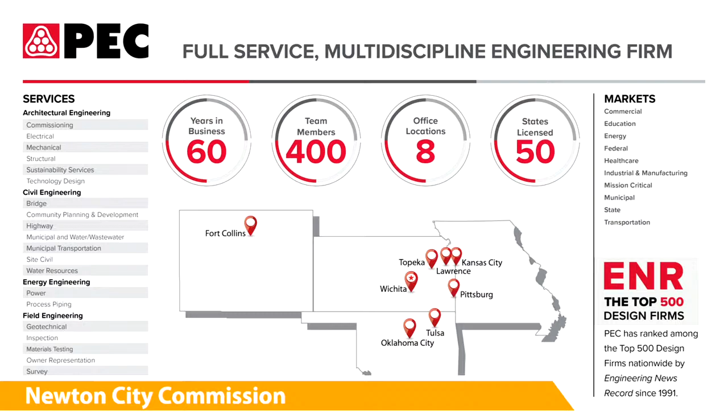I think probably most of you are familiar with PEC, or Professional Engineering Consultants. This is just a brief introduction to our company. We're headquartered down in Wichita, proud to be one of the only full-service engineering firms headquartered in South Central Kansas. We have about 400 employees and several satellite offices across the region, so we are very diverse in our expertise.

Now let's get to this particular project. The Safe Streets for All initiative is a relatively new initiative rolled out by our federal government. This program provides funding for both planning and capital projects to local governments all across our country. The goal, from the federal perspective, is to reduce fatalities and serious injuries happening on our public transportation network, whether that be highways, local streets, township roads...

...sidewalks and parks, really looking at the entirety of the network to reduce fatalities and serious injuries, which you can think of as a life-threatening injury that causes you to need to take an ambulance to the hospital. That's what a serious injury is. So from the federal perspective, that's the goal, to reduce these all across the United States on the entirety of the public transportation network.

Again, whether that be owned by the state DOT, KDOT in our case, or a township gravel road, we're really looking at the entirety of the network and all users of that network. Whether you drive a passenger car running errands, or a semi-truck as your job, or a farm implement, or maybe you're walking, bicycling, or in a wheelchair, we're trying to address the entirety of users across the entirety of the network.

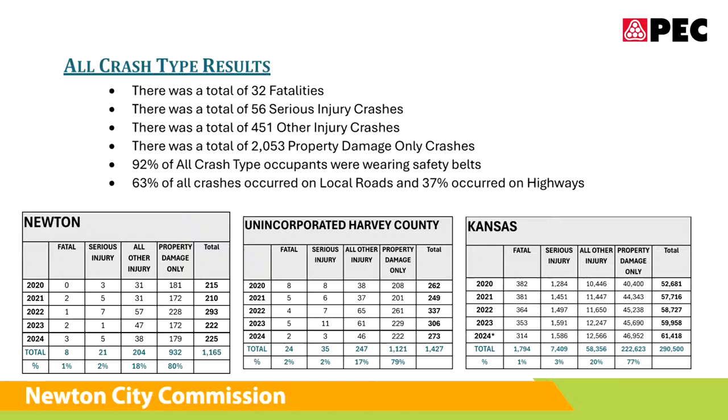So we took that, we got some of this basic information, and we put that into what we called a high injury network. I'm sort of summarizing a lot of this to get to this end product.

Yeah, I skipped those because they were real detailed. We have more information in the PowerPoint if we want to see some more detail, but essentially we were looking at the spatial distribution of crashes, the type of crashes, and the contributing circumstances that led to the crashes, as well as an engineering assessment of each location where a crash happened, comparing that with the traffic volumes on these roadways.

So here were, from the technical perspective, the major issues in Newton. Really focused on the intersections at the local streets. There's definitely a disproportionate risk to pedestrians and bicyclists in terms of serious injuries and fatalities as compared to their representation in the system, their activity in the system.

The behavioral factors multiply the severity. We've listed those there: distraction, speed, alcohol, and drugs. For example, if a property damage only crash were to happen, when these four other things get involved, the severity increases.

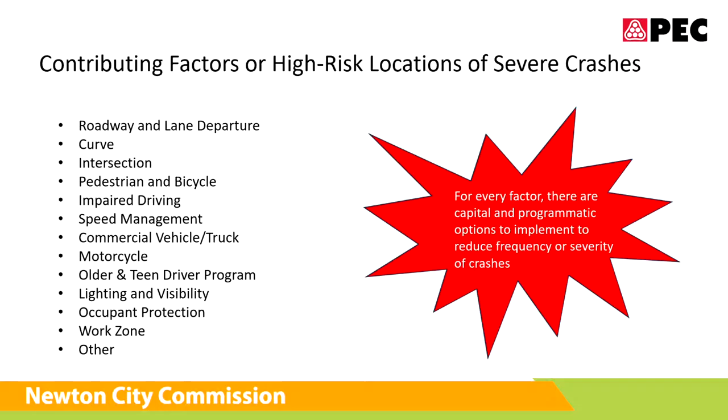So we've worked with the staff and have come up with countermeasures for all these different categories of things. I'm going to go give a few examples so you can get a sense here.

For example, roadway and lane departures. This is something that rose to the surface in the unincorporated county areas. So for a capital option, you could do rumble strips along the center line and rumble strips on the edge of pavement line. The goal here is it alerts drivers from drifting out of the lane.

Probably many of us have experienced these rumble strips. These have been proven to reduce fatal and serious injury crashes anywhere from 36 to 44%, depending on the environment it's in. So that's a pretty big bang in terms of reducing crashes for a relatively low cost. You're not going in and tearing up the roadway or reconfiguring the whole intersection.

And here's an example of a programmatic activity. You could add a line item or a budget for a road safety audit program in your annual CIP or your annual street maintenance budget. That would say we're going to do 5 road safety audits every year. You would set the number and say we're going to focus on going to specific locations, specific intersections.

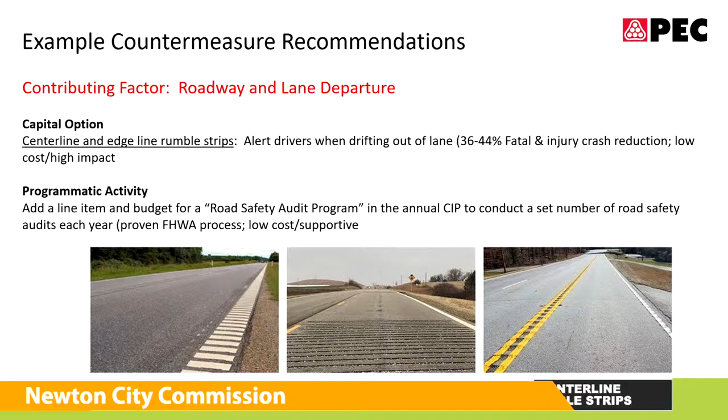Or we're going to pick 3, or 5, whatever your number is, and we're going to go out and do a road safety audit and really dive in and see what is going on at that particular location safety-wise. There are multiple capital options to treat this contributing factor and multiple programmatic activities. We're just trying to give you some examples quickly. We didn't want you to have to be here all night.

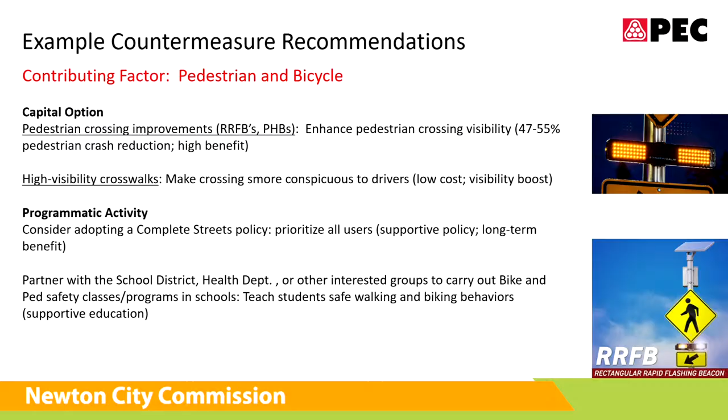I probably should have said that at the very beginning. That was really the reason for doing this whole plan, it was a requirement to have this plan done in order to be able to even apply for a capital grant through this program.

Probably should have said that at the beginning. I always make a joke that we have to go through this dumb plan to get the project we want to do. So we'll go through this exercise.

So the last example here was occupant protection. This is one surprising thing we learned through this, especially in the unincorporated part of the county. Here's a couple of capital options: adding a sign, or having stations to inspect child protection seats, car seats, or programmatic activities. KDOT has several programs to support inspecting how car seats are installed, so taking advantage of programs that other groups or governments are already doing, and promoting those.

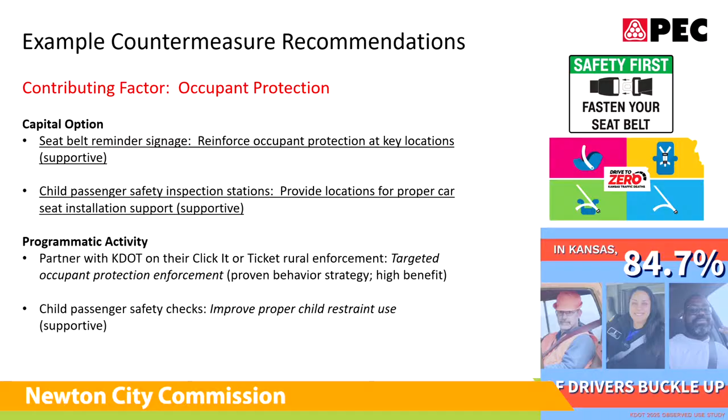Now I'm going to turn it over to Suzanne, and she's going to talk about the concepts that were developed. As part of our scoped effort, we were scoped to develop five separate concepts shared over both the city and the county. The idea is that whichever one is selected or rises to the top, one could be applied for by the city and one could be applied for by the county to get this capital grant that's coming out of this. Keep that in mind, and I'll turn it over to Suzanne.

The other thing I want you to keep in mind as we look at the concepts: be open-minded. These are not recommendations. We're putting forward some concepts that have multiple elements for the public to see and discuss, because we're taking this to the public forum to get input. The items were chosen based on all of the technical information and the public input that was put together, and we're trying to address the things we think will decrease those fatalities and severe accidents, and prevent others from happening.

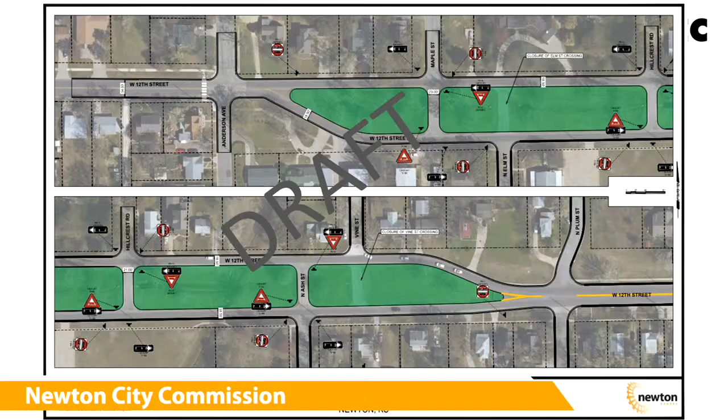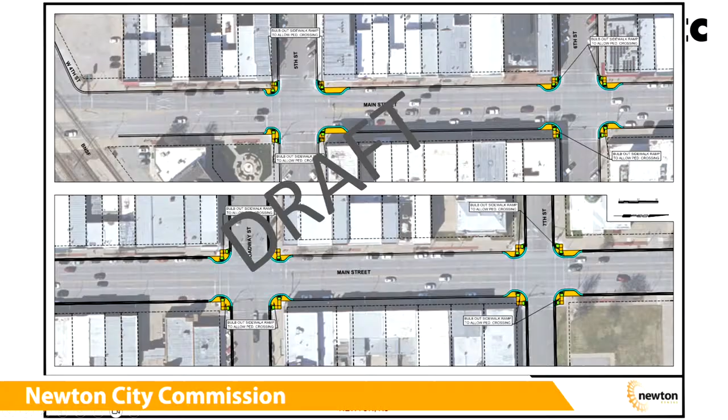So that's concept design 1, option 1 for this piece of Main Street. That's a blown up area so you can see it. It extends those bump outs to the opposite side of the parking, opposite the curb side.

Now, I would be remiss if I didn't mention there are some cons to this. Those cons come up when you start looking at drainage, because you've got inlets at those intersections that take on water, so getting drainage to flow around that, there'll be some tricks that have to occur in the design. And street maintenance staff, when they're clearing snow, can't just blade right on down straight through there - they're going to be going around little curved bulb outs, and that'll be an annoyance. So with everything, pros and cons.

Okay, now here's concept design 2A. I know these are little on the screen, but we've got things color-coded for you. For this one, this adds a protected left turn. Right now you only have one, right here at 5th Street. But this adds a protected left turn all the way down from the BNSF tracks to 8th Street, which for the driving public, you can see it's offset.

So let me go to the bigger view here. When you're at 8th Street, you see how the turn lane is right here, and it's not in the very middle of the road, it's offset. That allows the person making a left-hand turn to be able to see the oncoming traffic, so that you aren't turning and ending up with a T accident.

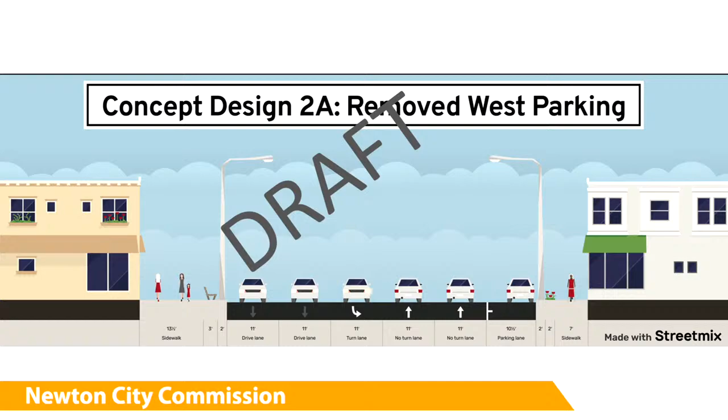Again, these are just elements, right? So here's concept design 2B. Same thing, you've got your lane going down the middle, you've still got your bulb outs, but they're only on one side.

I didn't point that out on the last one. They're only on one side, because if you don't have parking over here, you don't want to have your bulb out, or people would be driving into that bulb out. This puts the no parking on the east side. So you see the purple, that's the parking on the east side. It's the same as the last option, just flipped.

There it is up close, same as the other, just the other side. Looks the same in the cross section, we've just flipped it over. And there's no parking then on the east side, okay?

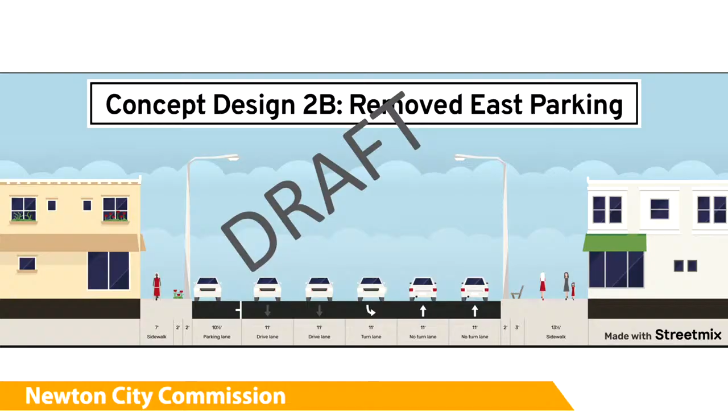All right, then concept design 3. This has your middle lane for turn protection, both sides.

Our traffic engineers have brought this forward as something to consider. The public has an opportunity to comment. This is not a recommendation. This is a concept, and there are multiple elements here.

You may just want bulb outs. You may want a turn lane only in one block. You may want, which I would question that a little bit, but it's something to consider. You may decide there's one block that you don't need as much parking. We're just trying to show you the elements of what you can do to help eliminate these conflict points, and make the transportation network safer for the walking, biking, and driving public, okay?

So this shows no parking, both sides. And then you have, how many times have you been driving along and somebody opens their car door, and maybe that causes an issue? So there's lots of things to consider when you start looking at no parking.

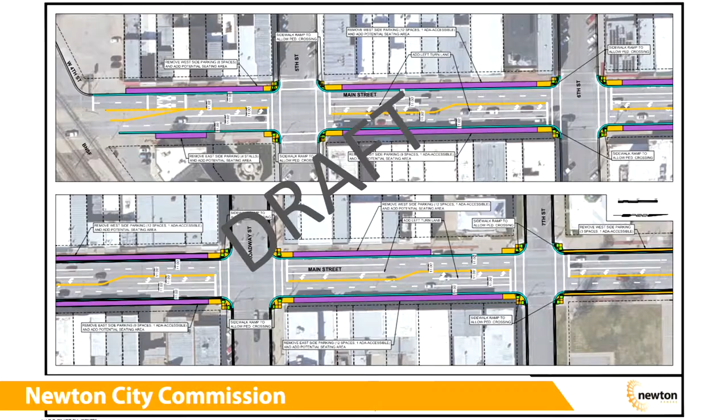In a less rural community, you wouldn't have parking necessarily downtown. It would be maybe behind the businesses, and then the places that you're going to go in and sit, you might have more tables out front along the sidewalk. That's the thing that you're looking at within your comp plan. I understand that has been some of the things brought forward for you to consider. Just to consider—these are just options, okay?

Here's the up close. So, and the next one is the one you really want to look at. Here's your cross section for both east and west. So you have sidewalk and room for tables, room for people to congregate, and then people can still drive through, you can still get your traffic through, but you would be parking behind instead of along the street, okay?

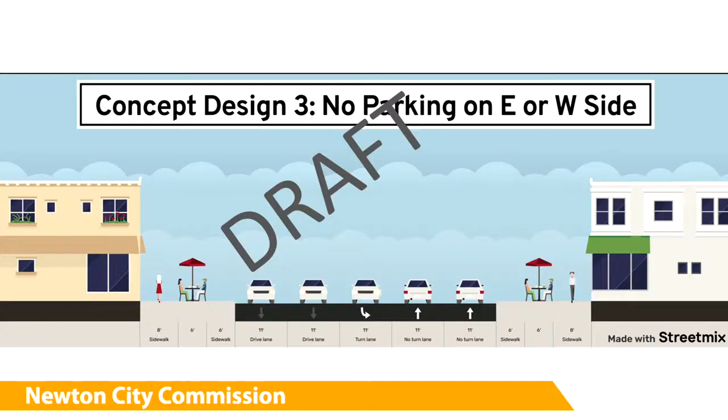Okay, let's move to the next section of Main Street, from the tracks south to First Street.

Same application, you skipped that slide. What? You skipped the one that shows how many parking spaces we—Oh, I'm sorry, yeah, you're right, I did. I don't know what happened.

Okay, so here, this shows parking spaces removed under each option. So 2A, when you remove parking on the west side, it gives you by block the number of parking spaces that are eliminated, total of 50, okay? For 2B, if you remove it along the east side, another total of 50, right?

The third one, where there's no parking on the east or the west, you're totaling them and there's 100. If you're looking at this map—and we didn't get this on here yet—but the colored dots, if you're looking at this later, the purple dots are the parking eliminated during concept 3. The green reflects concept 2B and the blue concept 2A. But the numbers tell the story, really. It's just looking at the blocks and where they'd be eliminated, okay?

Suzanne might mention too that even if we just did concept 1 with the bulb outs, you lose a stall for each one of the bulb outs. In most of those locations, you would lose your full parking spot for those bulb outs.

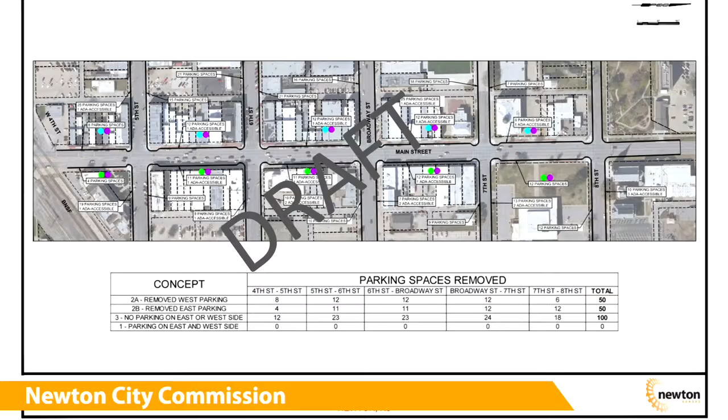50 sounds like a big number. Yes, it does. I'm afraid we might be run out of town for making a decision. But you're not making a decision. This is not a recommendation, these are elements to consider. Yeah, just removing parking spaces.

I mean, it's so tight anyway when you come downtown and people are looking for spaces. So where do they go? What would be the recommendation about where they would go? Around the block or side streets? When you go to Walmart, you have to park several spaces away sometimes to get in. This would be similar to that. You'd park on a side street or behind and go in a back door.

Now, you'll be glad to know that we are taking this similar presentation with these concepts to the public, and one of the groups we have invited, Jen has helped us, is the downtown group that we'll be speaking with. We're doing a special presentation for that group, so they'll be able to give all kinds of comment, very similar to how we did in the original community engagement round. So the purpose is to have people talk.

But remember, we would not be doing our job on this transportation safety plan if we didn't bring all the options forward. It's okay that you are going to consider other things when looking at them. But you could say, if we don't have as many parking spaces downtown, then people aren't going to come downtown and we won't have to worry about it because there'll be less traffic. And we won't, but if we didn't provide these things, somebody else is going to say, yeah, but everybody keeps getting hit, how come you aren't doing anything about it? So we're just trying to find a happy medium here.

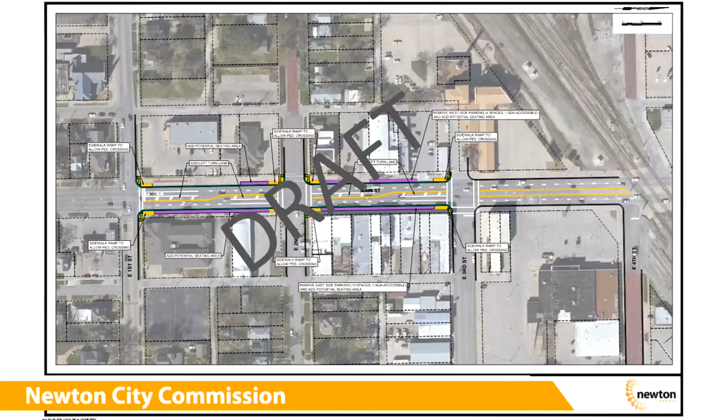It's just like the piece to the north. There's a slide that must have gotten eliminated, but we can get it for you — it shows the number of parking spaces for this section too. I don't know what happened there.

Okay, Washington Road. The concept design 1 is from Southeast 10th to Southeast 8th. Again, the reason we're looking at different areas is because there were accidents and crashes at all of these intersections. Due to sight distances, when you have multiple legs of an intersection — in this instance you've got 5 as they are today — and vehicles coming up to that intersection, the sight distance for somebody pulling up on Pine Street trying to look north on Washington is difficult to see for multiple reasons.

Walnut, same thing at Southeast 10th and Walnut. The sight distances, the points of conflict, and crossing multi-lane facilities here are several of the reasons we have accidents at these locations.

So what we looked at was trying to put a cul-de-sac and dead-end one road that had another way out, to eliminate one of the legs of the intersection. And we also have another element, remember, multiple elements: turning this roadway into a 3-lane facility so that you have a dedicated left turn lane running the distance here.

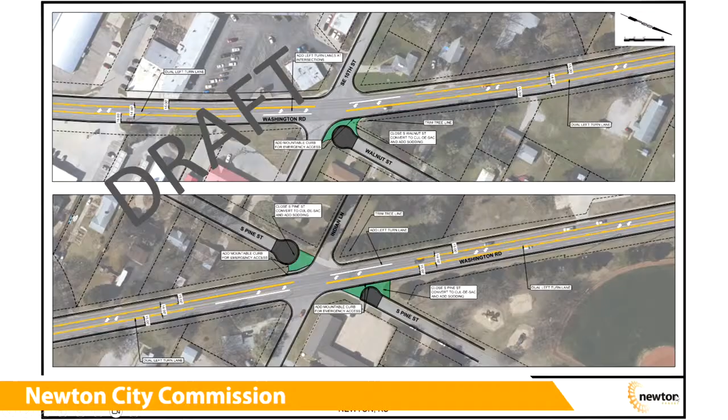This kind of gives you an aerial view so that you know what it would look like. They're just kind of fun when you can see a concept there, adding in cul-de-sacs.

We wouldn't show the elimination. Where there is parking today, I believe you'd be able to keep it. But if this was selected, we would definitely look at that in more detail.

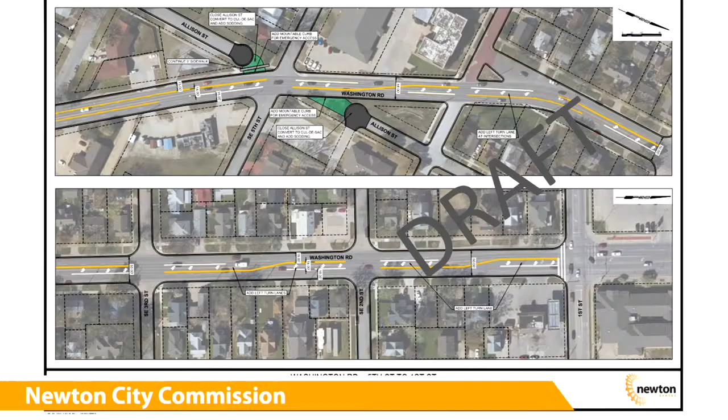All right, that's all of this - those were the city concepts. We'll quickly talk to you about the ones that we are proposing for the county to be considered. These will be available for people to look at the open houses, because the open houses are open to everybody. So the first one is at Hesston and Hoover Road.

Hesston Road, you know, that's Old 81 that goes out of Newton up to Hesston. And there are multiple intersections that have skewed crossings. They're not just crossing Hesston Road, but they're also crossing the railroad that's on the north - skewed, not at a 90 degree, which is the preferred method for traffic and transportation safety, so that you have good sight distance.

So if I'm gonna rebut this and say, well, why would we spend the money to do this? Why don't people just pull up to this intersection and square their vehicle? Well, why don't people just drive the speed limit? Why don't people do all kinds of things? But we implement traffic safety measures so that we are helping to address those conflicts that occur on the transportation systems. And so there would be some right-of-way that has to be purchased.

And this application at Hesston Road - there are multiple crossings that this could be addressed on, at all of those crossroads, to square it up, if you will.

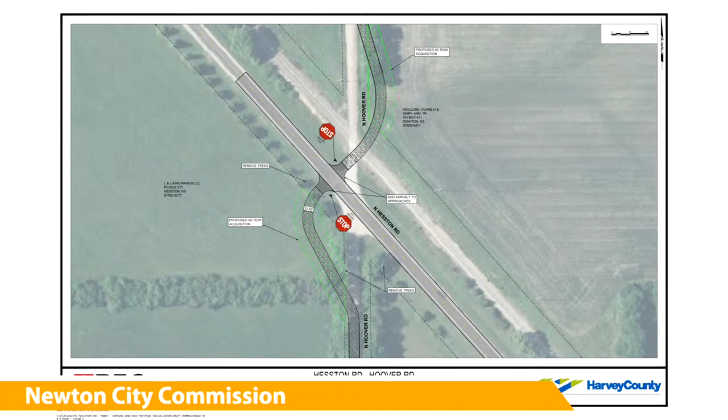Then the next one is down by Sedgwick - this is Ridge Road and 84th Street. If you've been on Ridge Road, you recall where you're coming up Ridge Road and then you do an immediate right turn, a 90-degree turn, and then another one back the other direction. There's accidents that occur in this area frequently. And that's what popped it up.

Plus, people commented about this one in our community engagement. So concept 1 for this location is the full bore - look at it and straighten out the roadway. There would be right-of-way acquisition, and then the road as it sits today, for those that access and or live along there, this would come in at a 90 to the new Ridge Road so that we don't create another problem, right?

And stop signs here at this intersection. That takes care of those oddball 90-degree turns.

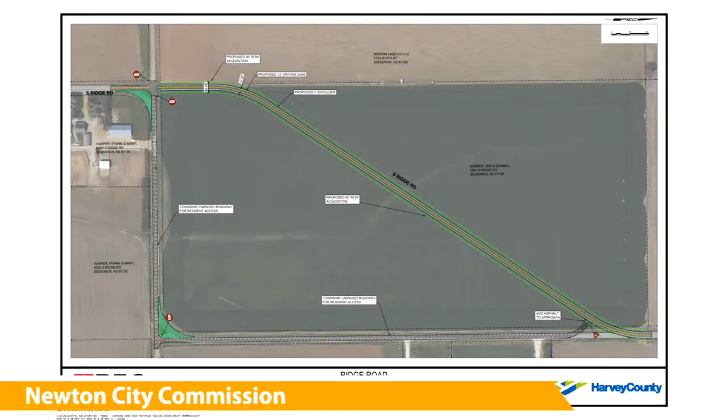Now, there's another option, concept design 2. This doesn't straighten everything out, but it puts in signage. It really improves the signage at this location. It's called enhanced signage, and we have a bunch of these chevrons, these arrow-looking signs that would have LED lights on them. When you light that up at night and add more signage, it helps be more visible to the driving public, trying to light up this area so people don't miss it at night, because a lot of times crashes happen at nighttime. So this would be concept design 2.

We would have people comment on these and the different elements of these options at the community engagement.

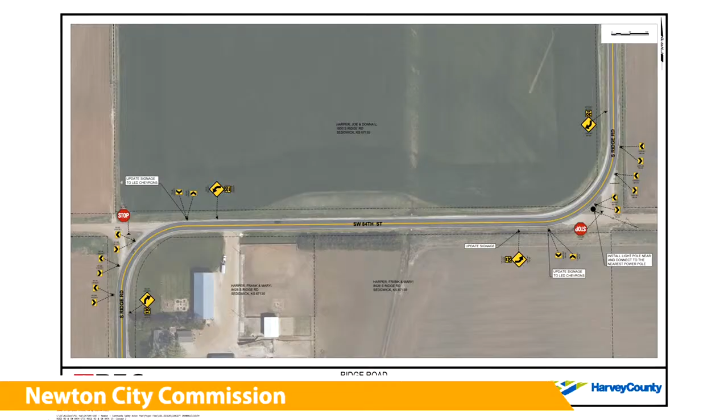As Suzanne mentioned, we have several engagement opportunities coming up. We've got them on the slide here, and I also brought a few flyers if you're interested. We're having one with that list of stakeholders, the stakeholder groups we had originally, just for them on the 20th. Then, like Suzanne mentioned, we're having a separate meeting with the Connect Downtown group, just with the downtown business owners, on the 27th. And we've got some open houses that same week, taking place across the city of Newton at the Rec Center, the Harvey County Courthouse, and the library.

We will have a design charrette where you can practice trying to fit different things into a set volume. It's a fun thing and a learning opportunity to show that we can't have everything, that there are constraints. We'll have property lines shown, so it's an opportunity for people to experience trying to design with constraints.

We'll have information about all these concepts, as well as information about what we've learned previously, and a way to confirm we've heard correctly some of the main themes coming out of that first engagement session.